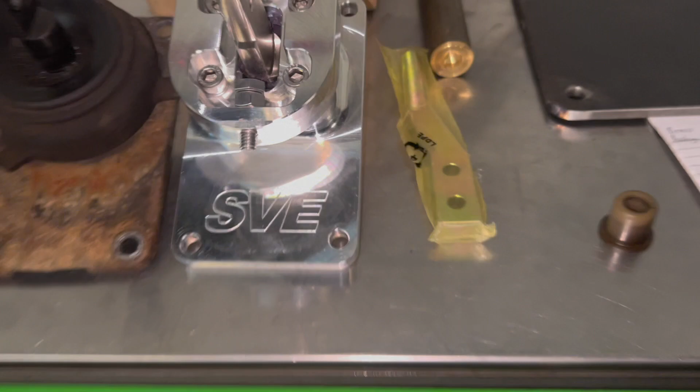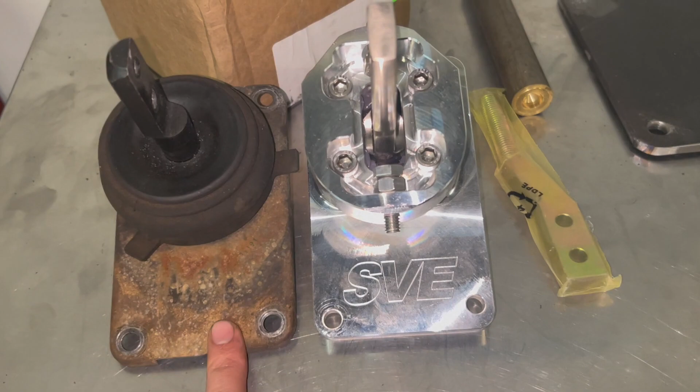All right, the new shifter kit came in from LMR. It is the SVE Mongoose short throw shifter kit, and just comparing the old base plate to the new one, you can tell big difference. This one is all aluminum and it's thicker, and this should be a pretty nice piece.

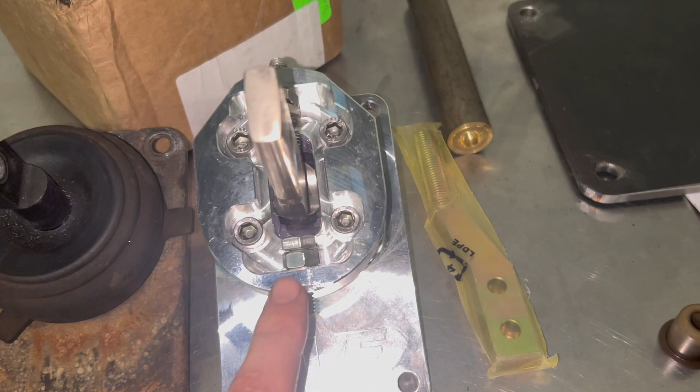We got the adjustable stops, so I'll show you all about installing that. Take a look at the old one. And the reason I needed the new one in the shop is so I could measure out dimensions for my new shifter piece, shifter bushing.

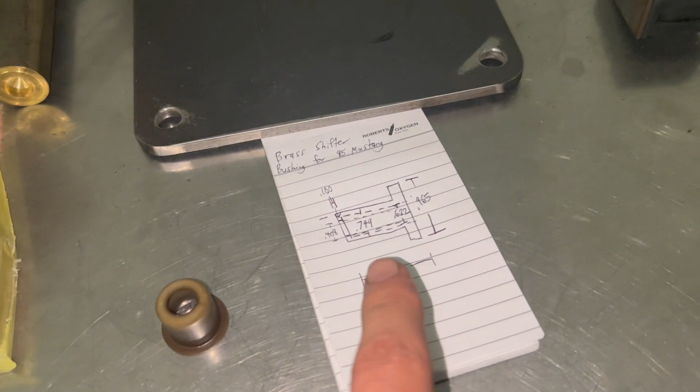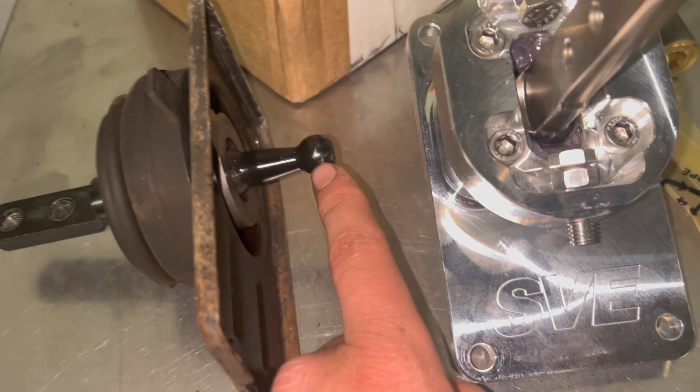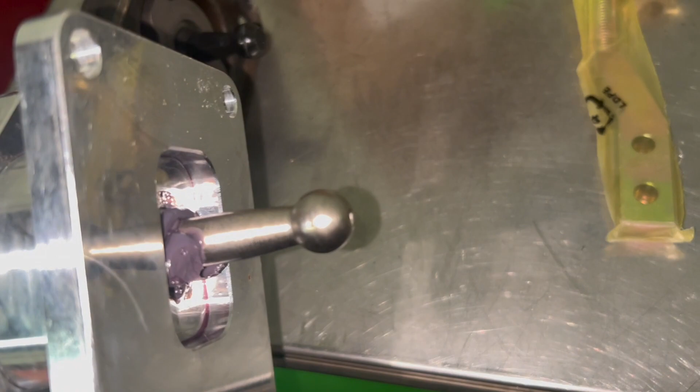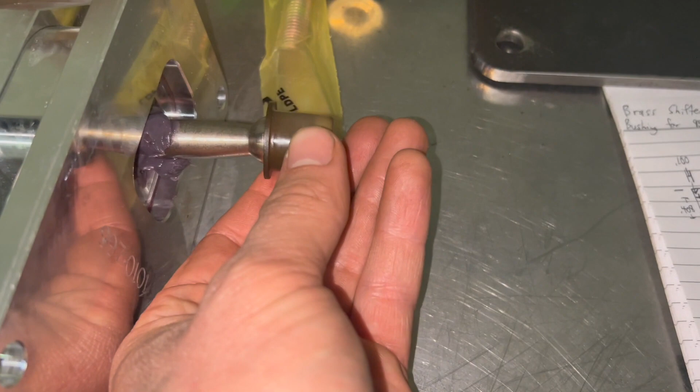I'm going to make it of brass. This one's plastic. And I went ahead and mic'd the old ball just to be curious on what the size was. It's 621 thousandths. The ball on the new one is 622 thousandths, so almost right on the money as the old one. But of course I had to have the new one to measure off the outside diameter of the ball, because the ball part is actually going to fit down into the brass shifter bushing I make. I want it to be a nice tight fit compared to the plastic one.

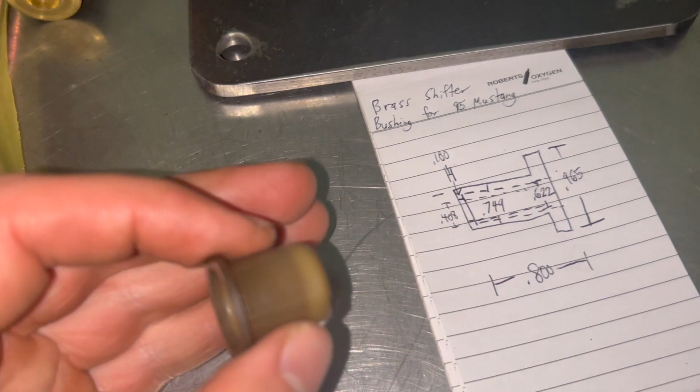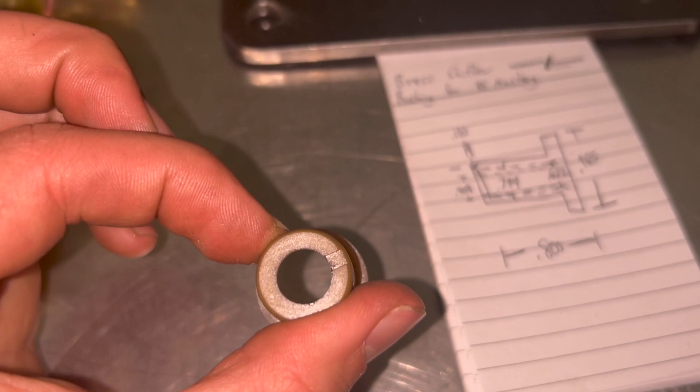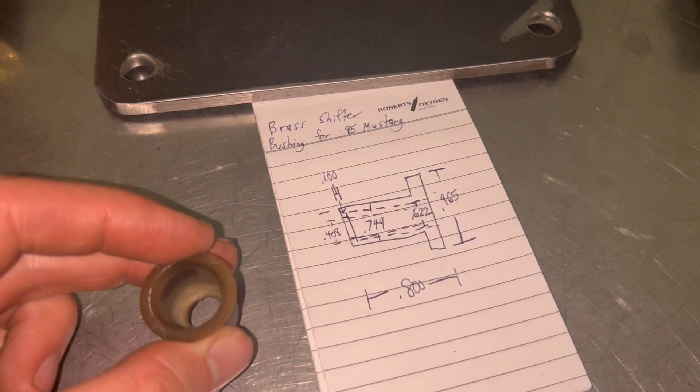Now the other thing is, I took this home with the mics and the snap gauges, and I measured the bore of the hole that this sits in down the transmission. It was 749 thousandths. The OD of this piece mics out to 746 thousandths, so that's a 3 thou slop. So I'm going to make my piece 749 thousandths on this fit here, so that it's a nice slide fit and it doesn't really have any slop when I install it later.

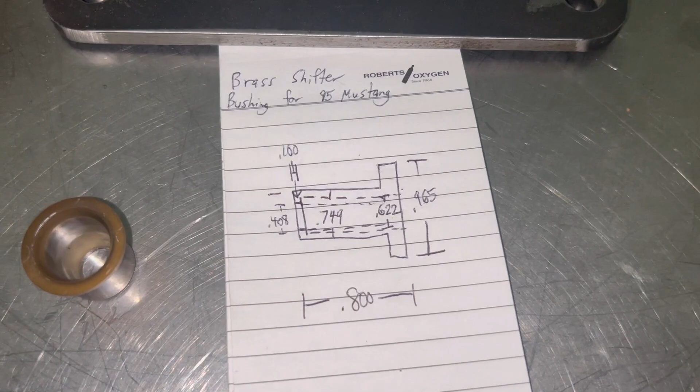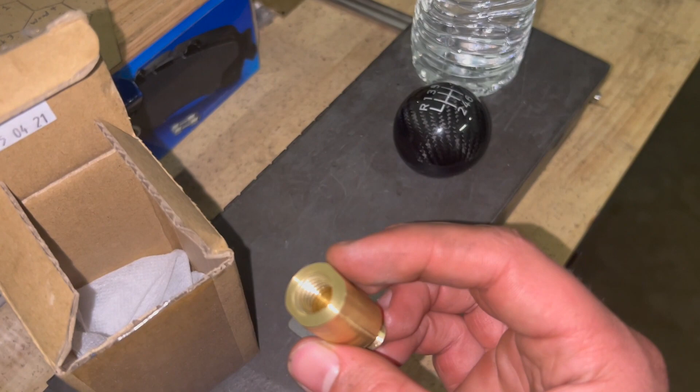All right, so I got my material here. These are my dimensions, and I actually have everything to size up off of this time. So unlike the brass piece for the shift knob, I should get everything right. And just as a side note, I did go ahead and change my dimensions on that to look more sleeker than the old piece I had.

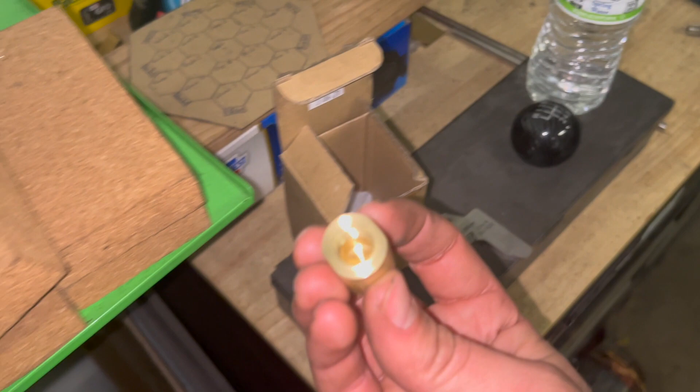And I got two flats still here, and I got the correct threads on the one end for the shift knob, and I got the other threads, and we can actually test it right here right now, because I know it fits on the old shift handle.

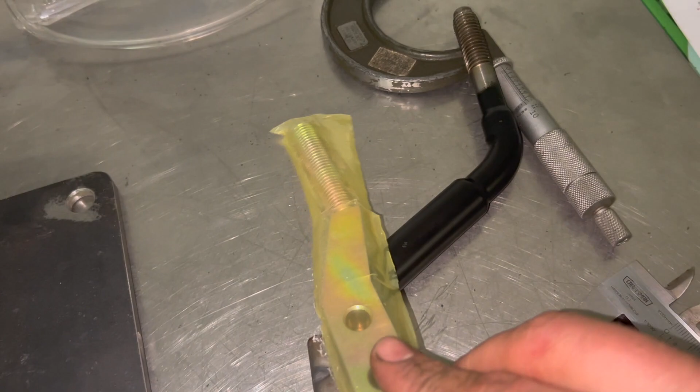And take a look at the two. You see how the old shift handle really comes back towards the driver compared to the new one. So I may have to maybe modify this even further, but let's see.

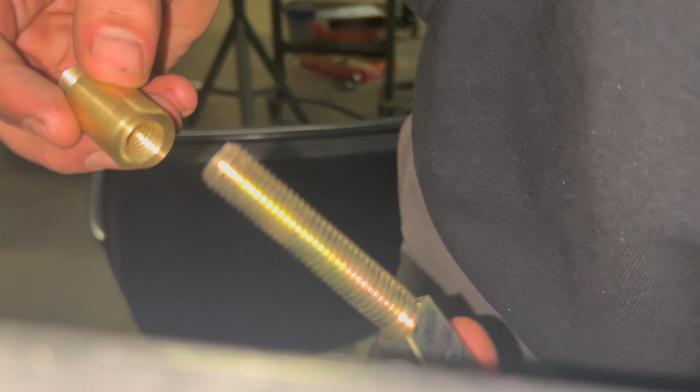Okay, this is the new shift handle I'm going to be using, and would you look at that, my brass adapter piece threads right on, so I'm happy with that. So I'm just going to run it just like that.

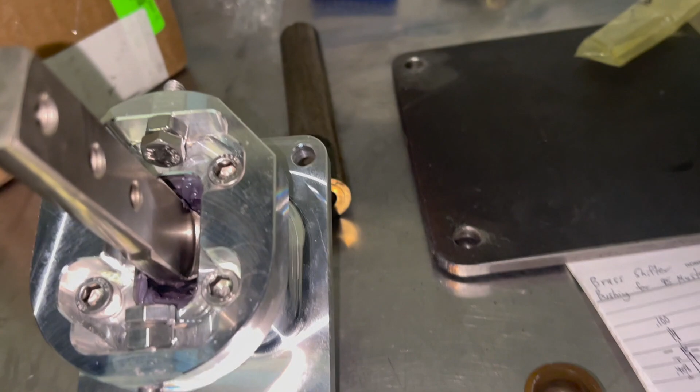And if you're installing this kit, I guess this piece is just going to sit on the one side or the other side, however you want it. I mean, it looks like these holes would work, so I guess technically you could run the old shift handle. I guess it's really up to you if you want the handle coming out more towards you as the driver compared to the handle it comes with.

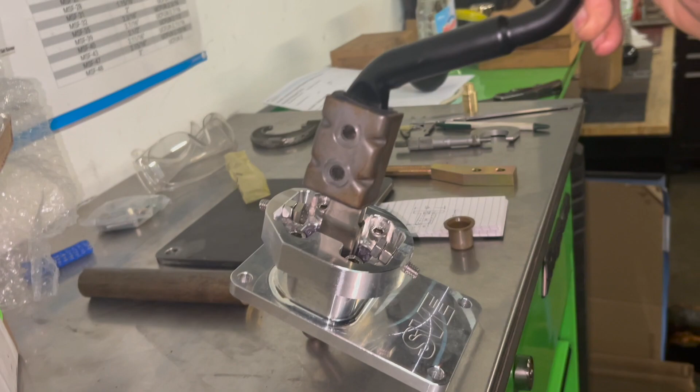So that's what it would look like. And this is what the new handle would look like. I guess you can flip it. You'd obviously want it angled this way a little bit towards you, but it really doesn't come towards the driver, so we'll see upon installing.

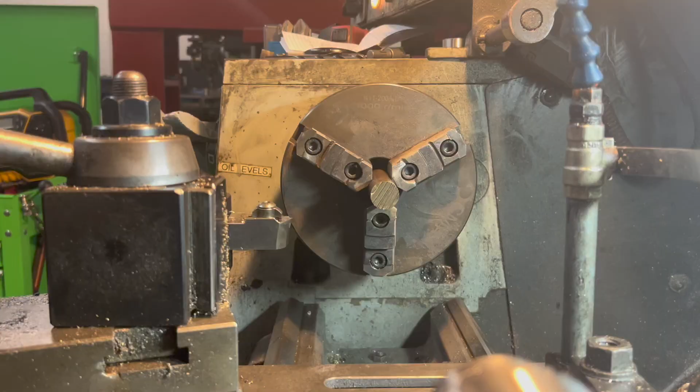All right, first thing we'll do is face our material per usual. I'll bring it a little bit closer. Here we go.

Next we'll come in and do our center drill.

Okay, the overall length is going to be 800 thousandths, so just over 3/4 of an inch. I'm going to come in, touch the tool to the face of the material. Yep, I got a mark there.

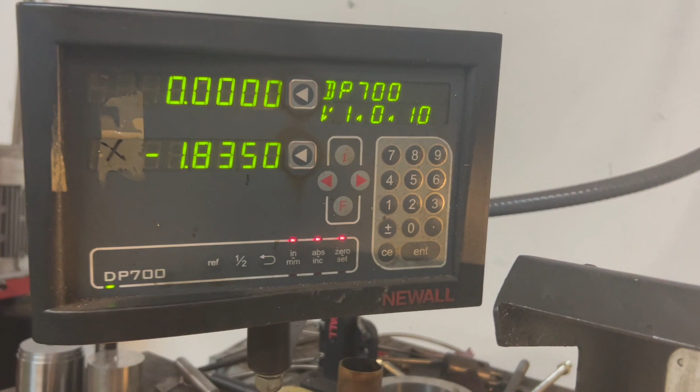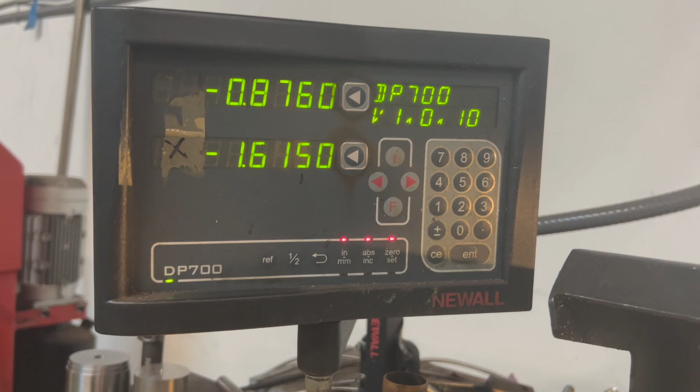As you can see, I'll zero out the DRO. And I'll crank this over a little bit past 800, because when I cut it off. Let's roll. 875, why not? 876, that's good. Zero that out.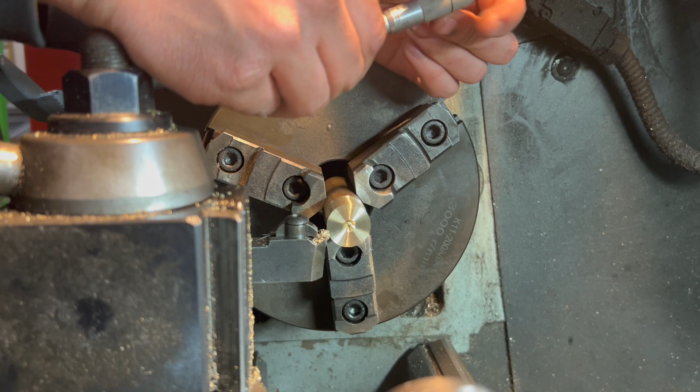And then we'll start making our pass down to 965 for the flange part of our shifter bushing. We'll go ahead and mic that. Should be about 980 or so. And we're looking at 976. I'm going to 965, so we'll go ahead and feed in, oh, I don't know, 10 thousandths.

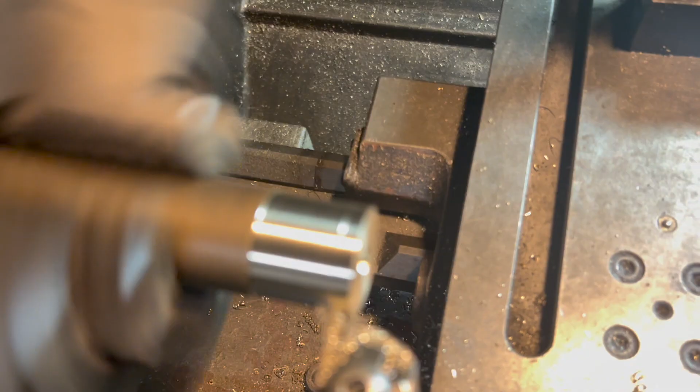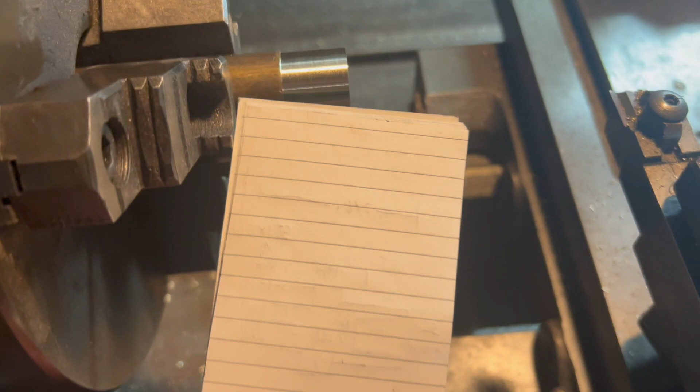Okay, so my fit right here is now 966 instead of 965, but I'm happy with that. 1 thousandths difference on the flange. It's not gonna matter. Now, one thing to note, if you see my piece here and my diagram, it looks like I'm gonna be having the flange piece be here and then continuing on, but I'm gonna have to flip this around later and grab it after I cut it off or facing it. So actually what I'm doing is think of it like I'm actually doing it kind of backwards.

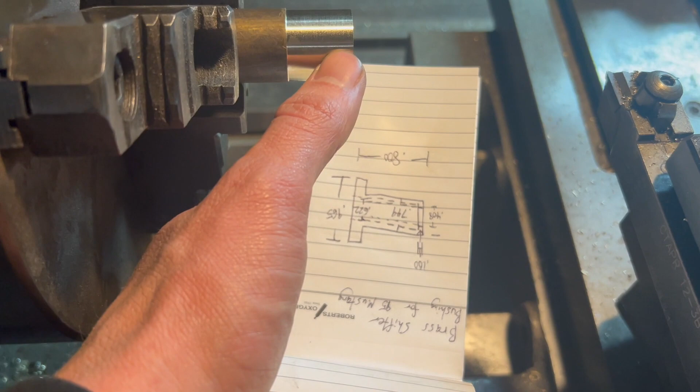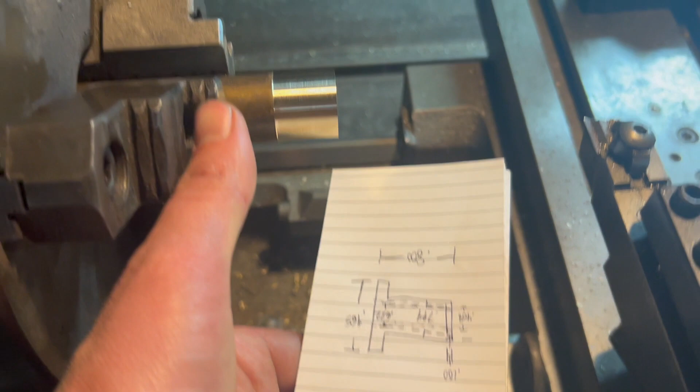So that way I can leave this back section, the flange part, and then this front section here, I'm going to do the body of the shifter bushing that sits down in the hole in the transmission. So I'm going to turn most of this fit down to 749, then later on, once I cut it off, I can grab it on this fit when I have to flip it around and grab it in the chuck, so I can get a nice face cut and then bore out the inside diameter to accept the ball for the shifter.

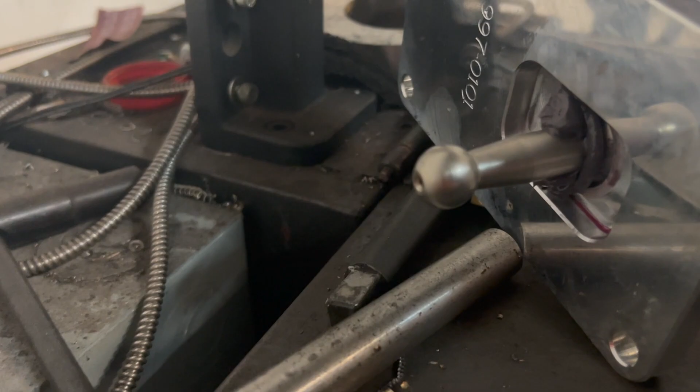So what I've got going on here is the fit was 774 and I'm trying to go down to 749. I fed in 24.5 thousandths to hopefully put me at 750, or maybe even take just an extra thousandth to put me at 749. So I only machined the first quarter inch section of it. I'm going to mic it, and if it's good, I'll feed the tool back across the rest of the way, or if it needs to go a thousandth more, I can feed it in and go the full cut. Or if I went too far, I could leave that as is and turn the rest of the fit to the proper size. So I'm going to mic it here.

Just a little trick if you're machining down to your final fit. Don't want to mess it up.

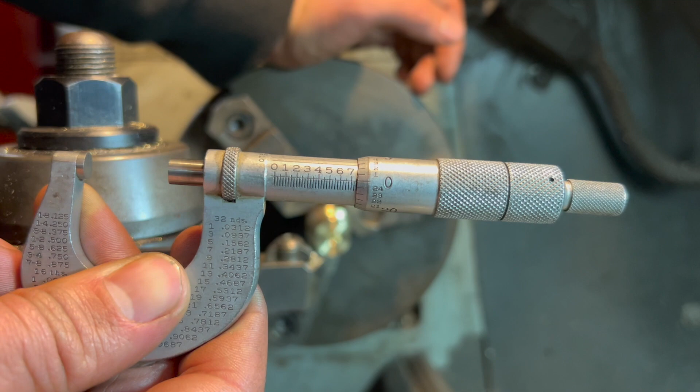Okay, so that is actually right on 750. Now based on using the snap gauge down in the hole where this sits in the transmission, it's 749, so this would not fit, and I'm definitely not going to press it in because that'd be a nightmare to get out of the car in the future. So again, I just want my slide fit. So what I'm going to do is feed in a thousandth more and then let it run the whole length of the fit here.

Chamfer your edges. That way it has an easy start in whatever piece you are inserting it into.

And actually that's honestly perfect, that's 748.5 thousandths, so half a thousandth on it. It's actually perfect. So size for size, it may struggle to fit when installing it, so half a thousandth under is perfect. Yeah, I'm happy with that.

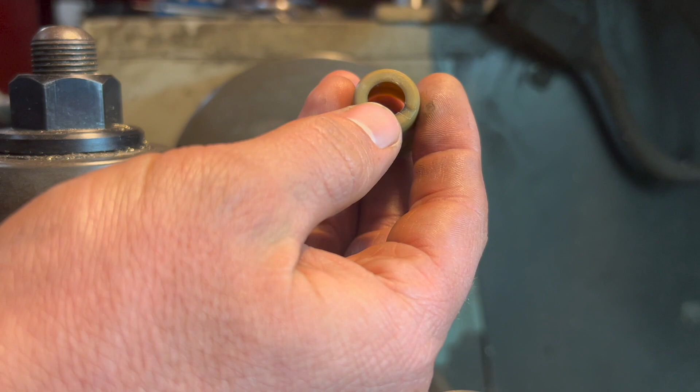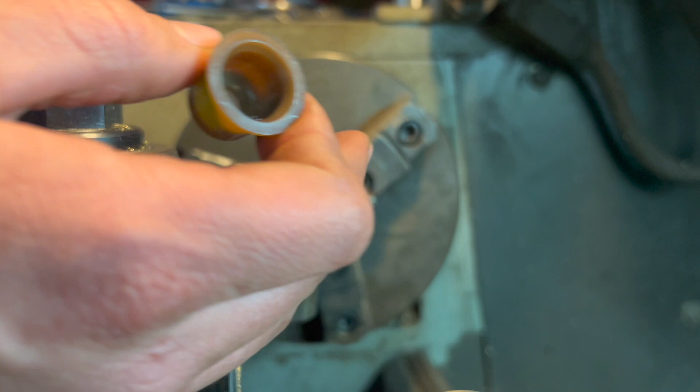Okay, so at this point, I was actually going to bore through to the back hole size, the 408, but I realized I just kind of want that to be true with this hole, this ID. So what I'm going to do is, instead of continuing on, I should not have center drilled, but that's okay. I'm just going to choose not to go in from this side. I'm just going to cut my piece off, flip it around, grab it on the fit here, and then do all of the inside machining from one side.

So yeah, at this step, I can go ahead and take it out of the chuck.

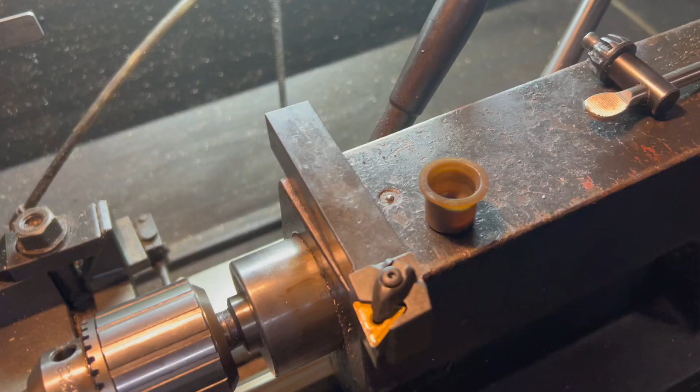Okay, so here's my piece cut off in the bandsaw, and you can see it's pretty darn close. The flange is only going to be a 1/16 of an inch thick. It's a little bit more than that, but I should have enough to get it by with 2 face cuts, maybe even 3, to get it down so that the top is flat.

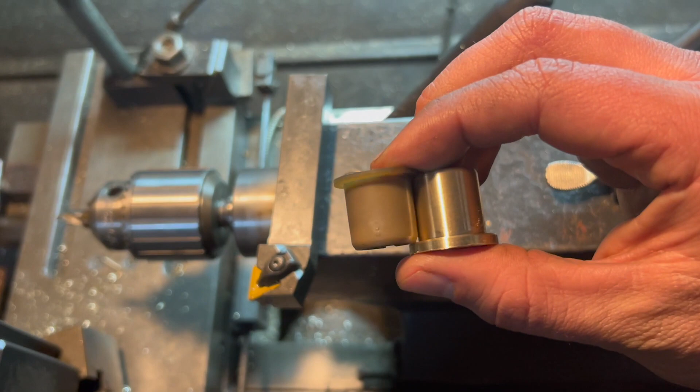And then if you're ever unsure about the length of your fit of a piece you're machining, if you have the old piece to reference, you can lay them backwards against each other, and if the flanges touch on both sides of your pieces like this, then you know you're correct on the length of your fit part. Or you could just measure it with the back of the caliper.

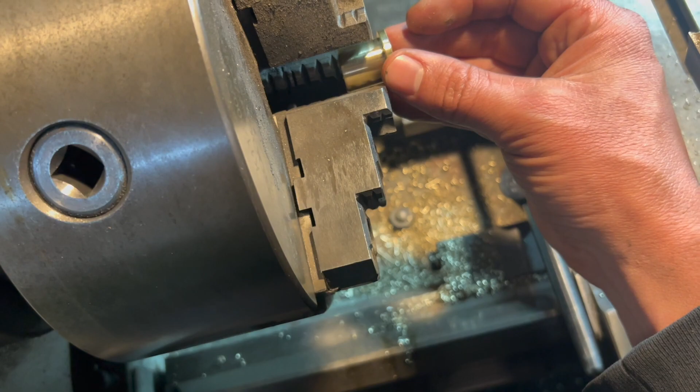But anyway, since this is still a solid piece, I'm going to be able to get a nice good grab on here. I don't want to go too tight, because once I start to hollow it out, the piece is going to get weaker, and I don't want it to end up deforming. So I'll grab it firmly, but not over tight in the chuck.

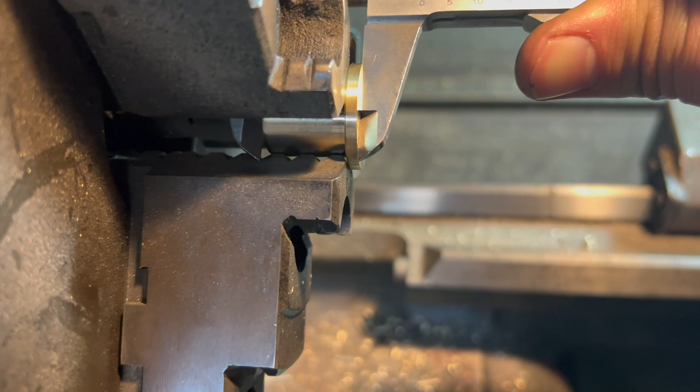Okay, so now I took a couple face cuts and got it nice and true on the face. So now I can take my calipers, and yes, you can sneak one jaw in between the chucks to get the back of the piece, and the other jaw on the front, just like so. And get a good grab and slide it out, and we're looking at, may be hard to tell in video, but we're looking about 856.

So that's pretty good, so I just need to take off 56 to get down to my 800 size overall length, and then after that, I have my center drill already set up, and I can start boring out the middle.

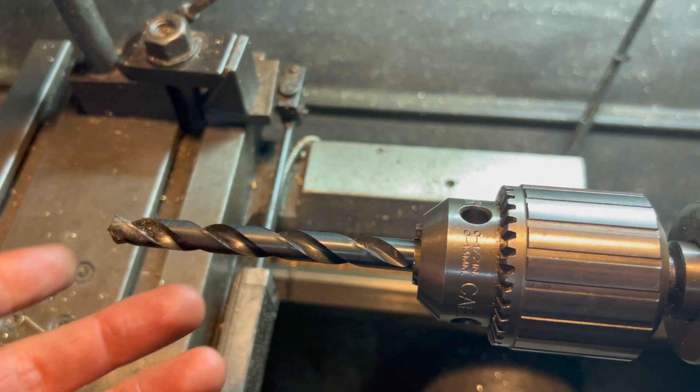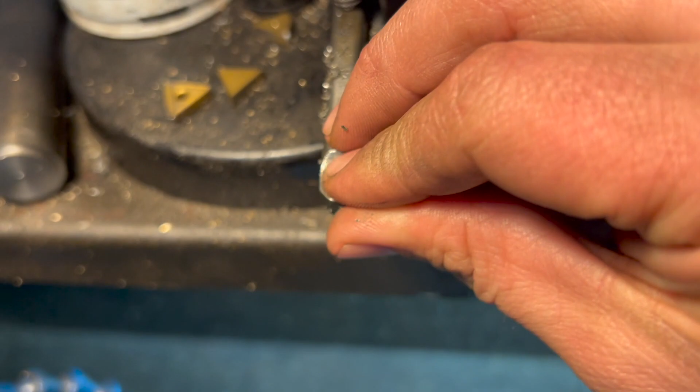All right, so I got it faced down to 800, and I got my center drill started with the hole. Now I got my 13/32 drill, which is 406 thousandths. Now it does call for 408 thousandths, but since this is the smallest boring bar we have, and it's definitely bigger, about half an inch wide at least, that's not going to work. So I'm just going to have to run the drill all the way through the piece, and the drill will actually slightly walk a little bit, so it'll probably end up coming right around 408, so I'll just run with that.

It's drilling, but it's not happy about it. Definitely needs to be sharpened. But we are through, so we don't have to sharpen it today.

Okay, that's what our piece is looking like so far. Now the next part, the bore bringing out the 622 for the ball on the shifter, that's only going to go down. We're going to leave a 100 thousandths wall at the end, so we're just going to bore all the way, 700 thousandths.

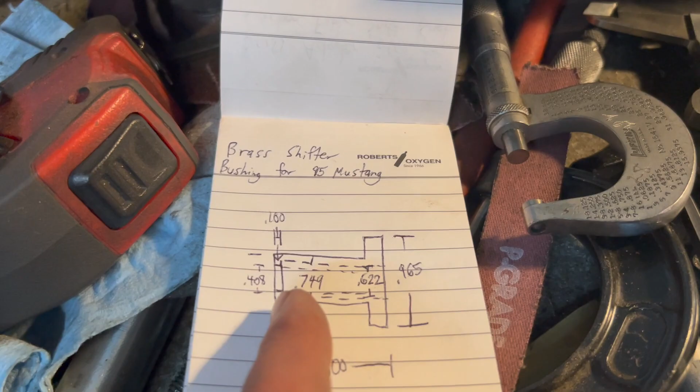But before I can fit this boring bar in there, yeah, that doesn't quite go. So what I'm going to do is take another drill bit, step this up to slightly bigger than that, but not quite 622, and then we can start to go in with the boring bar.

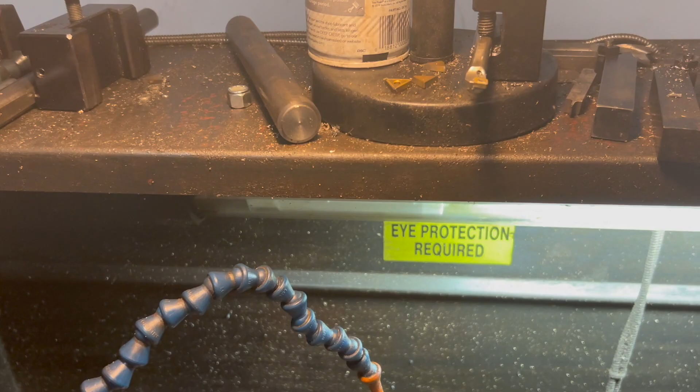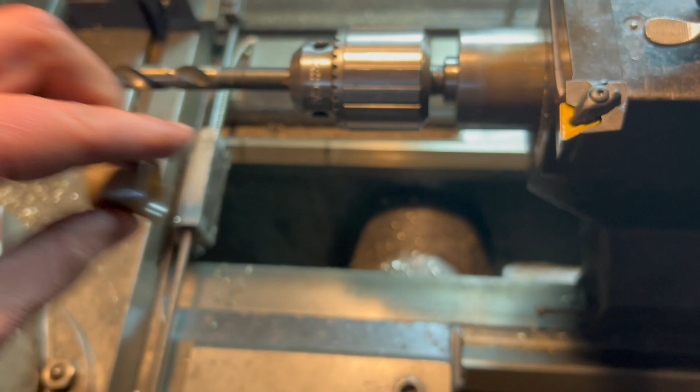Okay, looking down towards the bottom of the old plastic shifter bushing, it looks like it's kind of rounded at that bottom face right before the hole. So what I'm thinking is I have a 35/64 drill bit, which I'm going to drill mostly through the brass piece before I start going out with the boring bar. Now this is 546 thousandths of an inch and 8/10, so call it 547.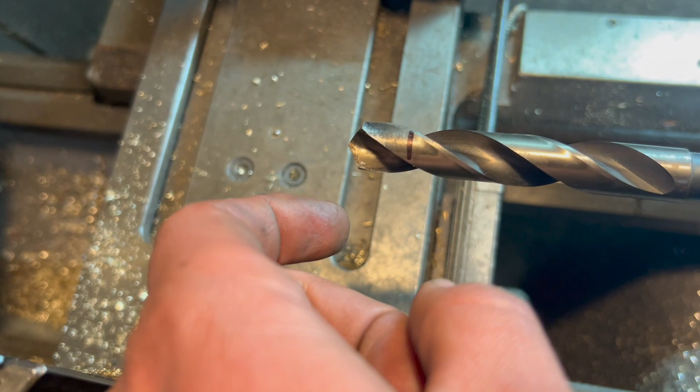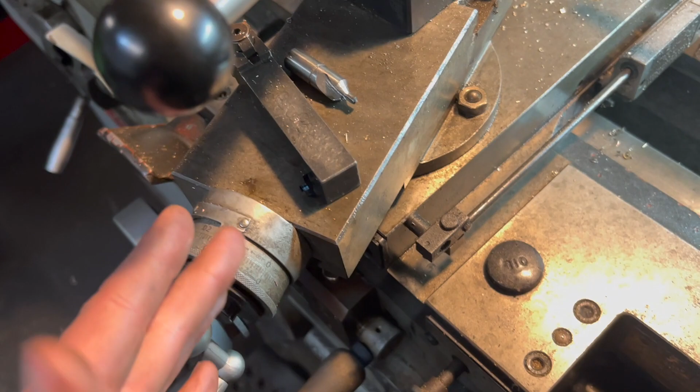Now I have my mark 3/4 past the tip. So I'm thinking if I go about 750 into my piece, the rounded portion will go into that last 100 thousandths fit or so and kind of round out the bottom of it, which will be better than trying to crank the compound, set it up at the right angle and everything, and try to, you know, almost blindly look in there and get a nice chamfer in the back. So why not just let the drill bit do the work for us? So we'll try that and see how it looks.

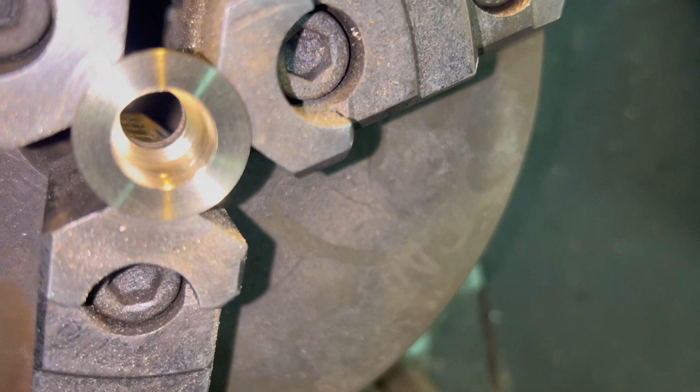Okay, so here's what we got. The flash is washing out the inside bore, but honestly that's kind of exactly what I was looking for, so I'm gonna roll with that. I don't think I can get the right angle to take in the view on the other side of the piece, but that's what we're looking at.

And now the boring bar should easily fit, yep, right into the piece.

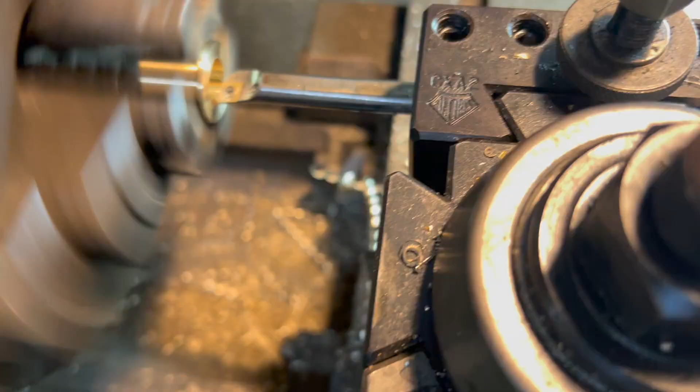All right, so I got the boring bar set up now, and I actually went in with the 37/64 drill bit. So from 578 to 622, we're dealing with about 44 thousandths. So I'm going to take this one real careful, and since this is a small boring bar, I'm going to be taking light cuts anyway. I'm pretty close to my size, but I'm going to be taking light cuts.

So I'm going to go ahead and take care of this, and I'll come back with you with the test fit of the ball end of the shifter.

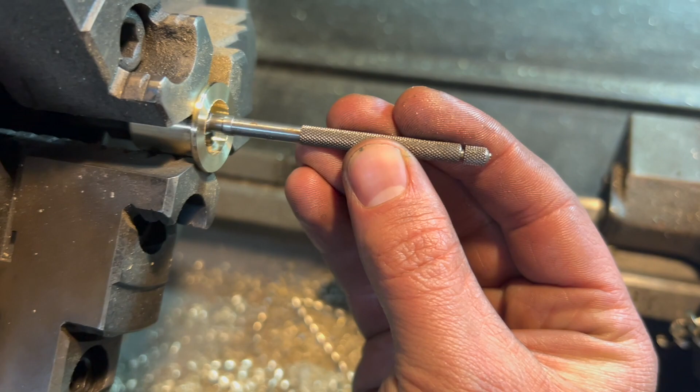Okay, so this is my first pass down in the bore. And after checking it with the snap gauges, you put the snap gauges in there and then you pull it out, and then I mic'd the snap gauges and I got 587. The 12 is about on the horizontal line. So 587 up to 622, again, taking it real slow, 10 thousandths cuts at a time.

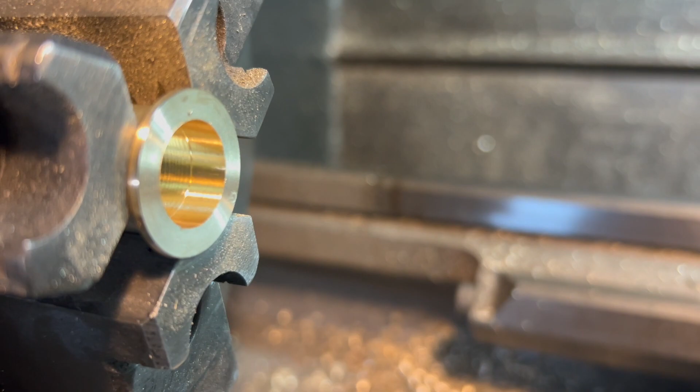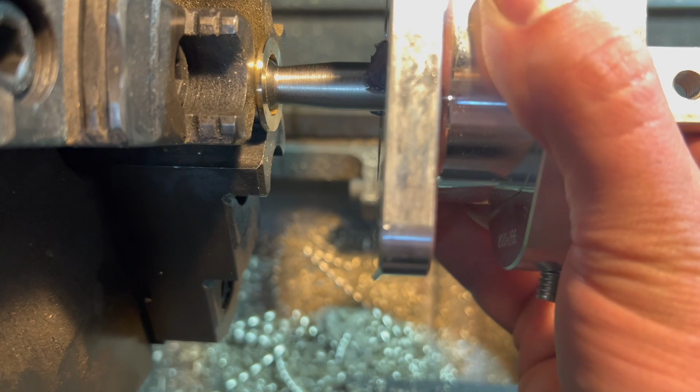Okay, so you can see here I machined part of the fit, about 1/4 inch in, and I'm doing my test fit with the ball. And as you can see, line it up, it just barely slides right in. So I'm very happy with that. I'm gonna leave it as is and just run the tool all the way down to the back inside of my piece and count that as a success.

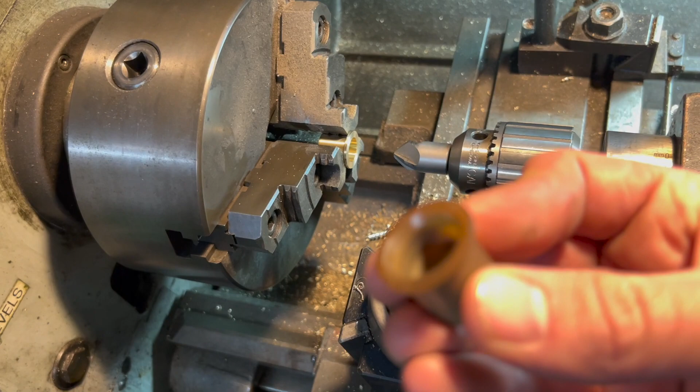And the last thing to do is just to put a little countersink on the face of it, just like this one has. You can see it has a pretty healthy countersink on it. And then also don't forget to deburr the backside once you're done with your piece.

One brass shifter bushing completed for a 95 Mustang. Of course, it'll also fit a 94 or any T5 equipped car, I would imagine, going back to all the Fox bodies. I want to thank you guys for watching.

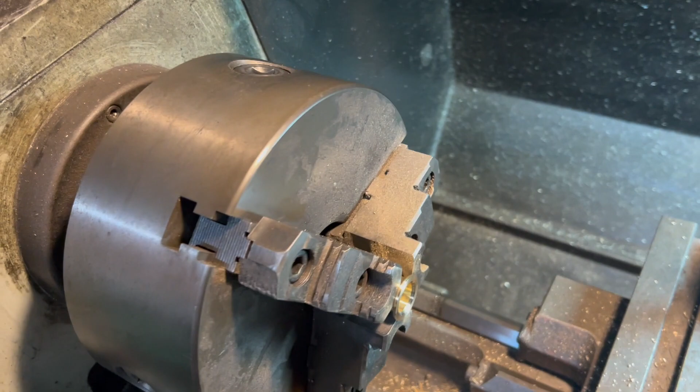And if you have the access and ability to make a piece out of brass rather than plastic, I highly recommend it, because it will just, I imagine, improve shifter feel. At least that's how it was for my 1990 Miata when I did this. Similar process. So pretty cool that I can do this. I know not everyone has access to a machine shop, but cool nonetheless.